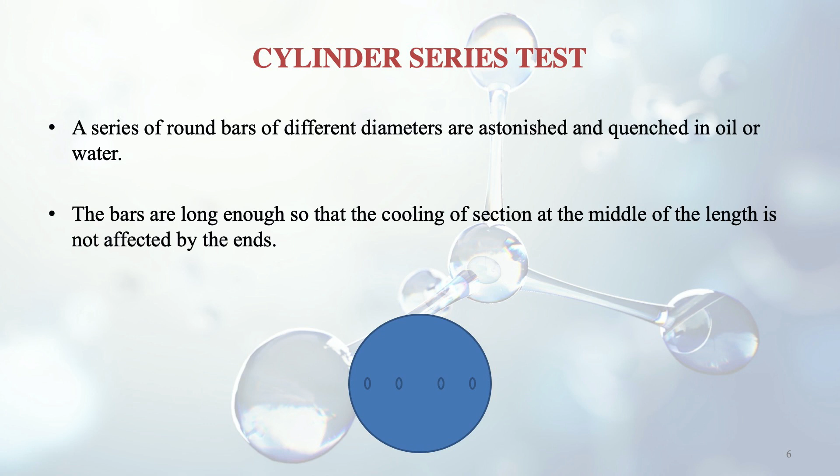The bars are long enough so that the cooling of the section at the middle is not much affected by the ends. If it is not long enough, then the cooling at the middle portion of the cylinder will be affected by the ends. After hardening, what happens?

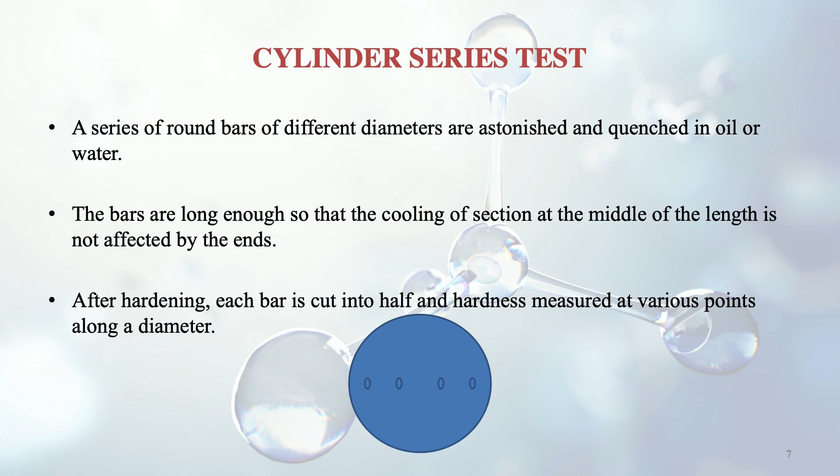Each bar is then cut into half and hardness measured at various points along a diameter. Now suppose this is the cross section, as shown in the figure. This is the cross section of the cylindrical bar, so when it is cut, the cross section will look like this.

Then there are small points, small circles you can see. They are meant to signify that that point is there to measure the hardness up to that region. So these points represent that thing.

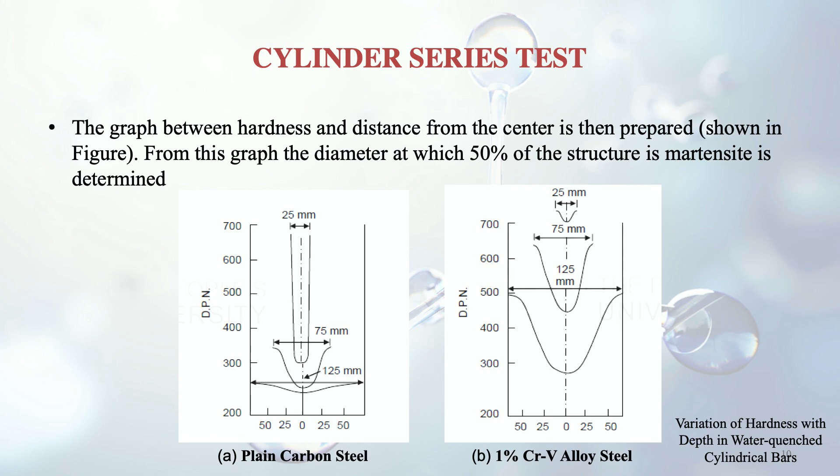We can see that martensite is around 700 on the diamond pyramid hardness number, so around a 25 millimeter diameter cylinder can be turned into 50% martensite. This is what is signified in this figure.

The first figure is for the plain carbon steel which I have described to you, and the second one is for the 1% chromium vanadium alloy steel. You can see in the second figure there is a difference.

At 500 diamond pyramid hardness number, you can see that a 125 millimeter cylinder diameter hardness can be achieved, whereas in the previous case, in the first figure, it was only at a hardness level of 250. So we can see that the chromium vanadium alloy steel gives better hardness.

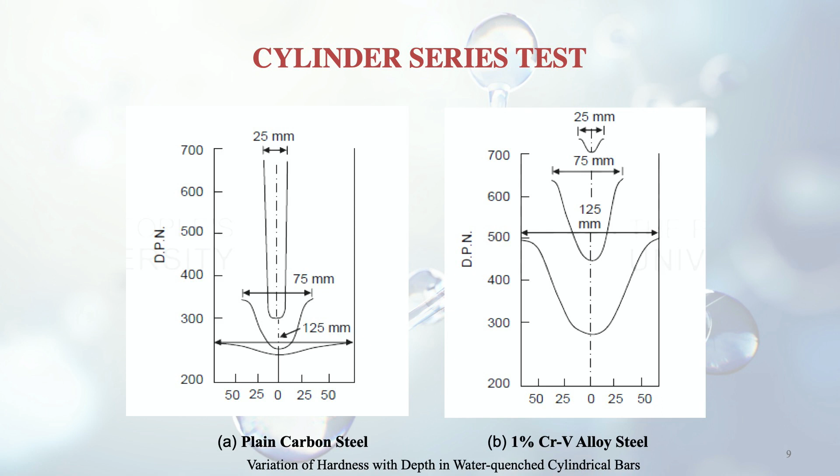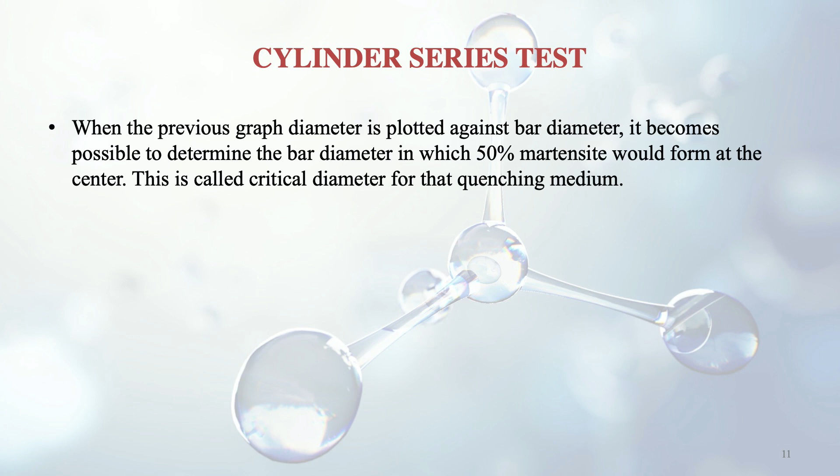This previous graph diameter which we saw is plotted against the bar diameter. In that way, it becomes possible to determine the bar diameter in which 50% martensite would form at the center. When we do this, this diameter is called the critical diameter for that quenching medium, and we get the critical diameter at which 50% martensite of that particular body will be formed.

Since the rate of cooling is less for an oil quench than for a water quench, the critical diameter of any steel will be less for oil quenching than for water quenching. Yes, it is quite obvious, because the rate of cooling in oil is lesser, so lesser martensite will be formed, and when we make a cylinder out of that martensite, its diameter will obviously be lesser.

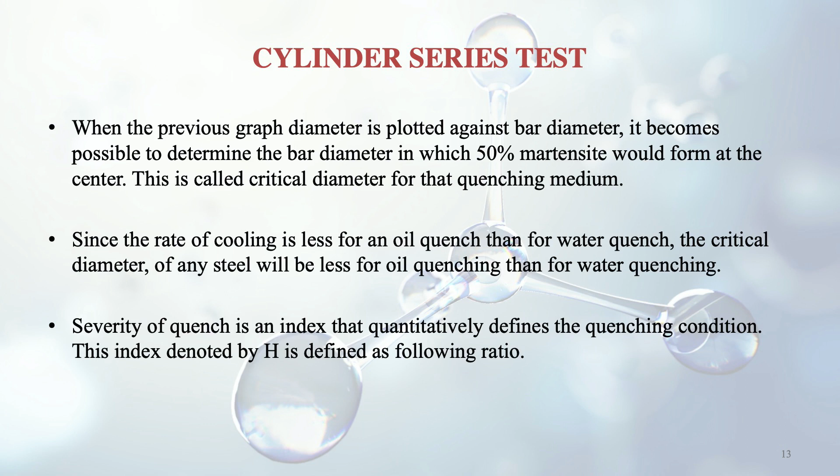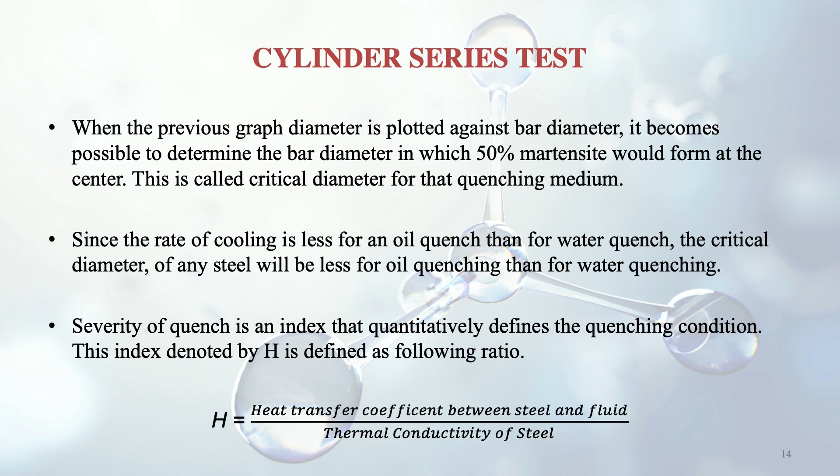The severity of quench is an index which tells us about the quenching condition, denoted by capital H, and is defined as the ratio of the heat transfer coefficient between steel and fluid divided by the thermal conductivity of steel.

So it is the ratio of these two things: heat transfer coefficient between steel and fluid, and thermal conductivity of steel.

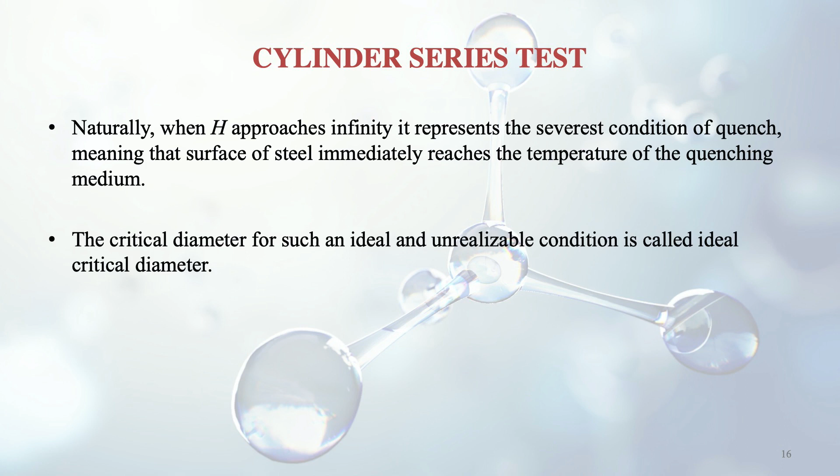When H approaches infinity, this value represents the severest condition of quench, meaning as soon as the surface of steel is in contact with the quenching medium, it immediately changes into martensite, or reaches the temperature of the quenching medium immediately. So the critical diameter for such an ideal and unrealizable condition is called the ideal critical diameter.

And for infinite H value, the critical diameter and the ideal critical diameter will be the same. It is very obvious. Now you see here in this diagram, it will be more clear.

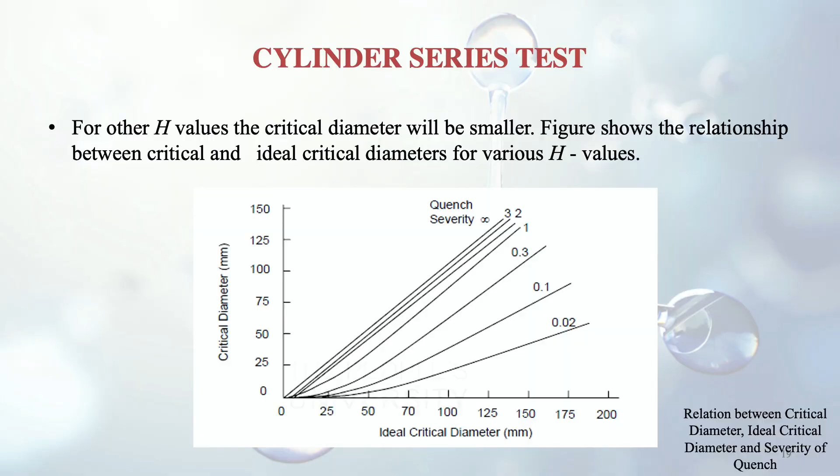And when we move down, then the ideal critical diameter will obviously be larger than the critical diameter. So this was about the cylindrical test, and now we move on to the second test, which is the Jominy test for measurement of hardenability.

This is more convenient actually, and there is a standard specimen of steel shown in the figure. This one is again austenized in the normal manner like it was done in the previous case, and the lower end of the specimen is then quenched by a standard jet of water.

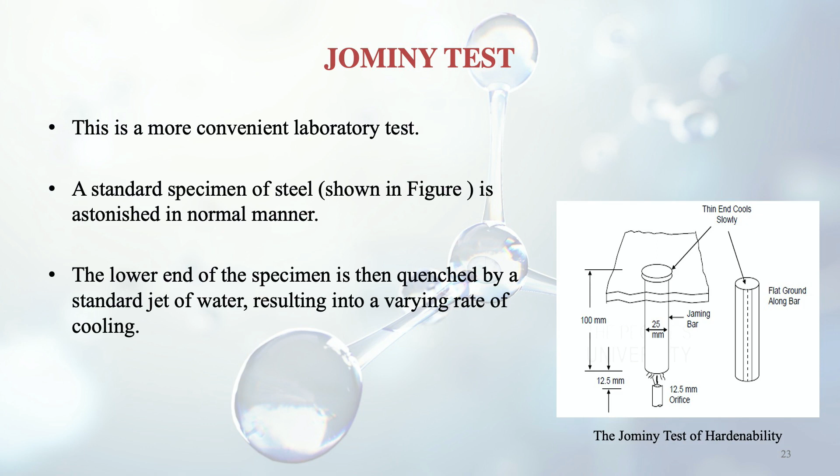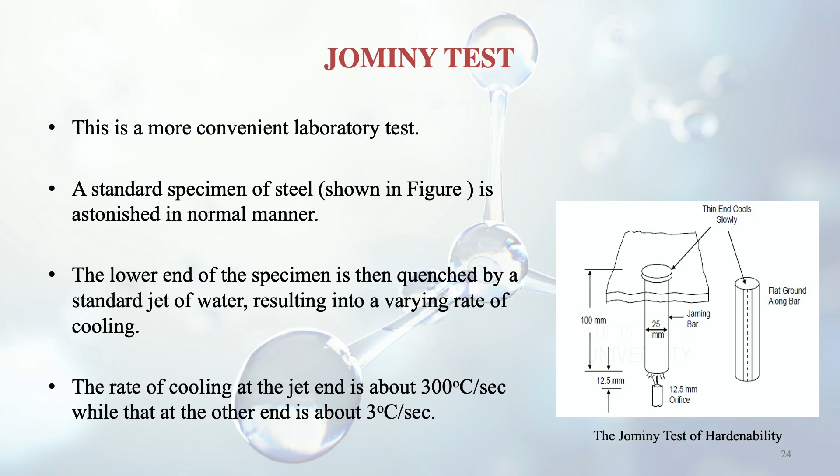You can see in the figure there is a jet of water at the bottom, and it results in varying rates of cooling. The rate of cooling at the jet end is about 300 degrees centigrade per second, while at the other end, the top end, it is only about 3 degrees centigrade per second.

This varying cooling rate produces a wide range of hardness along the length of the Jominy specimen. We know that hardness varies with cooling rate, so if the cooling rate is different at one end and different at the other, obviously the hardness attained in that specimen will also be different at different portions.

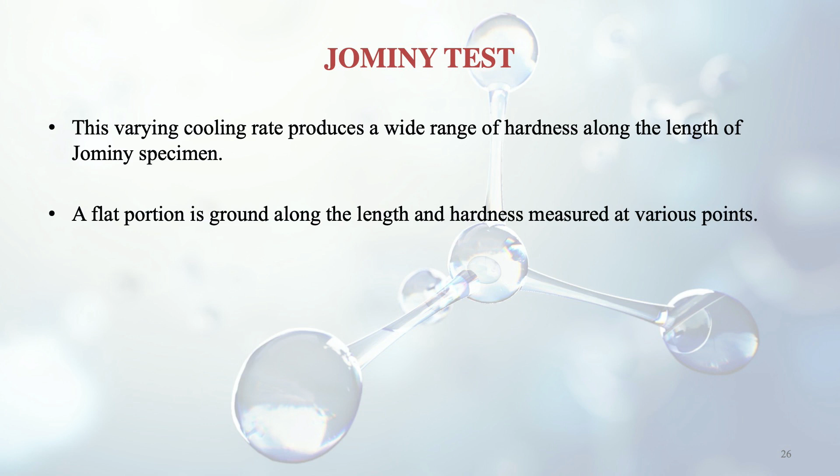A flat portion is ground along the length and hardness is measured at various points, and the plot of hardness along the length gives us the Jominy index of hardenability.

Suppose you draw a horizontal line on the curve from the vertical axis; that line will correspond to the hardness of the semi-martensite zone. Semi-martensite means that 50% martensite has been formed, that's why its name is semi-martensite.

Then from the point where this line meets the Jominy curve, we draw a vertical line which falls onto the x-axis. From there we get the distance from the quenched end for this hardness.

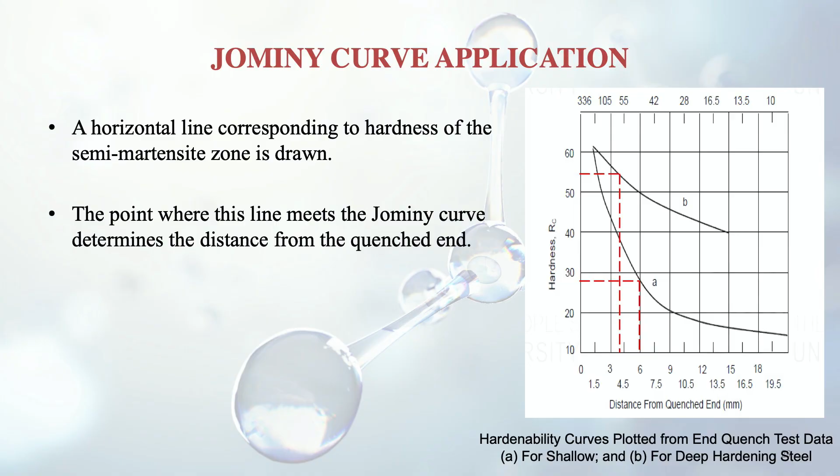From there we got the distance from the quenched end, and now when we plot it against the diameter of the bar, we can get the diameter of the cylindrical bar which can be completely hardened with this process.

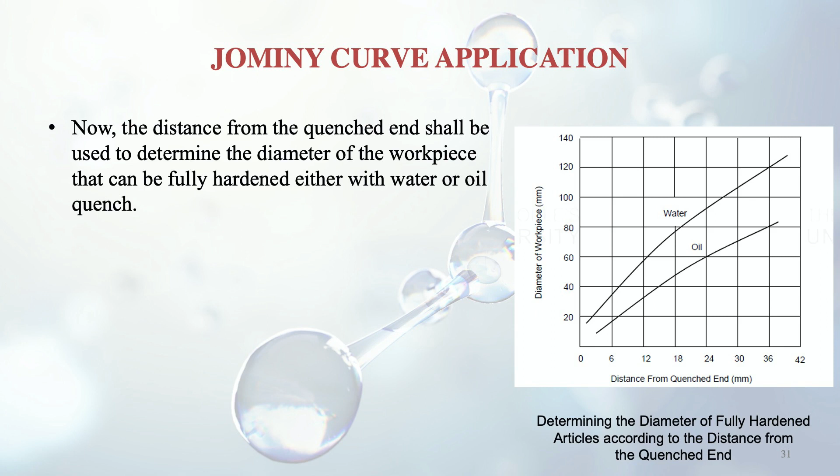If you draw a line on the oil curve up to the oil graph, and from where these two intersect, draw a horizontal line falling on the y-axis, you get the diameter of the cylinder that can be completely hardened. So if it is 6 millimeters distance from the quenched end in case of oil, it will meet around 18 millimeters on the cylindrical bar. So a cylindrical bar of 18 millimeters can be completely hardened with oil, and for water it will be around 38 millimeters, as you can see from the graph.

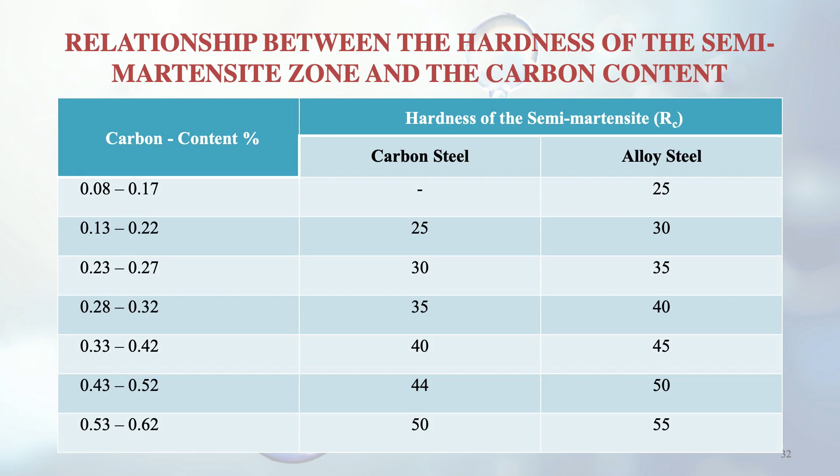After discussing how the measurement of hardenability is done, we move on to the next topic, which is tempering. We will now understand its purpose.

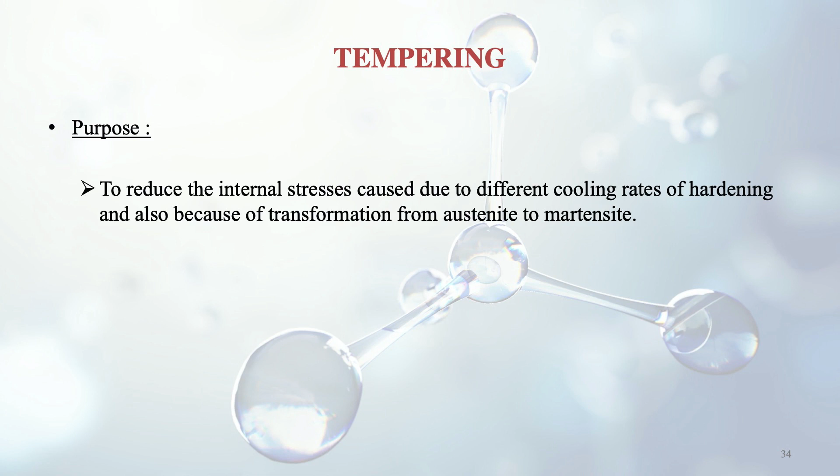The purpose of tempering is to reduce internal stresses. These stresses arise during heat treatment and other mechanical working, and they are detrimental to the microstructure, so they must be removed. They are caused by different cooling rates during hardening and by the transformation from austenite to martensite. As we discussed earlier, when austenite changes to martensite on quenching, cracks and internal stresses can develop. The cooling rate is very important, and tempering helps reduce these stresses.

So what happens in this process? In tempering, the hardened component is heated between 200 and 600 degrees centigrade. We heat the specimen within this range and hold it at that temperature for a predetermined period of time.

There are two main factors: the temperature range and the time for which we hold it, and depending on the holding time we get different results. After holding at that temperature, cooling is done slowly to room temperature. This is the process of tempering.

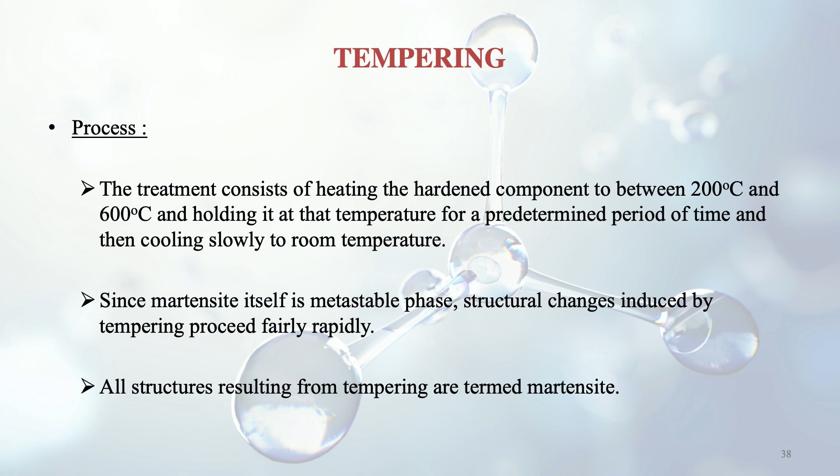Since martensite itself is a metastable phase, structural changes induced by tempering proceed fairly rapidly—it is not a very stable phase, so changes occur easily since no equilibrium exists. All structures resulting from tempering are termed as tempered martensite.

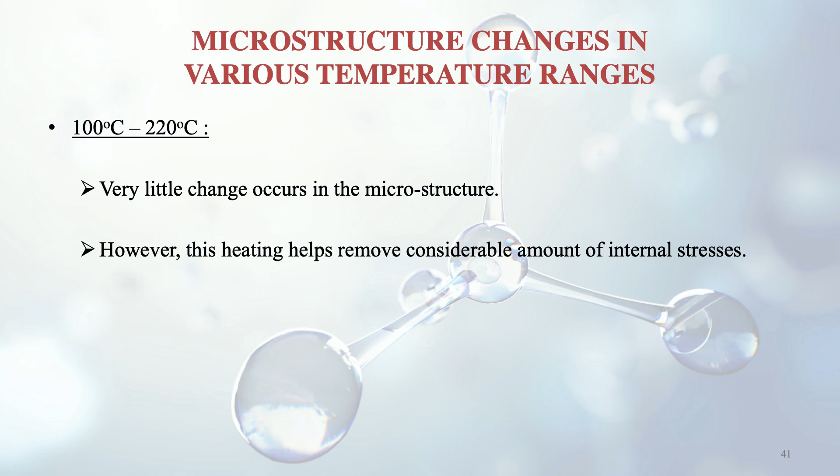Now we take up what happens at different temperature ranges during tempering. In the range of 100 to 220 degrees centigrade, there is very little change in the microstructure, but the heating helps remove a considerable amount of internal stresses.

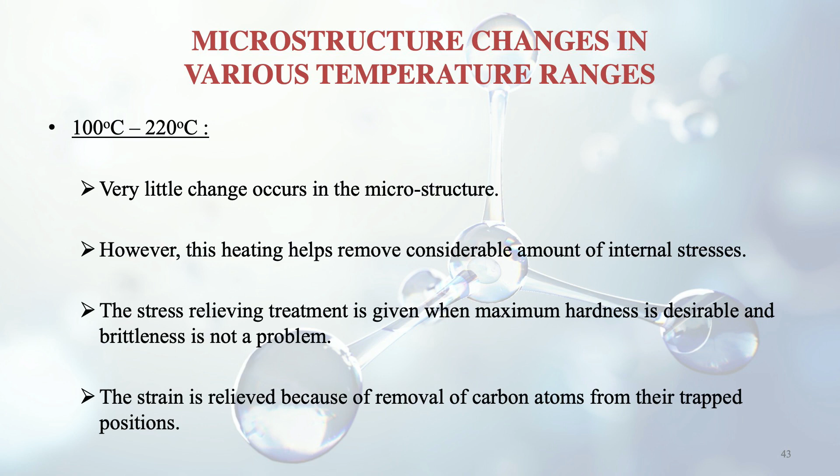Stress-relieving treatment is given when maximum hardness is desirable and brittleness is not a problem—we need to retain hardness while avoiding brittleness, and tempering is very useful here. In this case, strain is relieved due to removal of carbon atoms from their trapped positions. As studied earlier, in martensite the carbon atom occupies a position between the iron atoms, causing distortion and resulting in a body-centered tetragonal structure. Removing this carbon atom gives a better structure with lower internal stress.

After the 100 to 220 degree range, we discuss 240 to 400 degrees centigrade. In this range, martensite decomposes rapidly into an emulsified form of pearlite known as secondary troostite. This material is very fine in nature, and hence it provides good shock resistance.

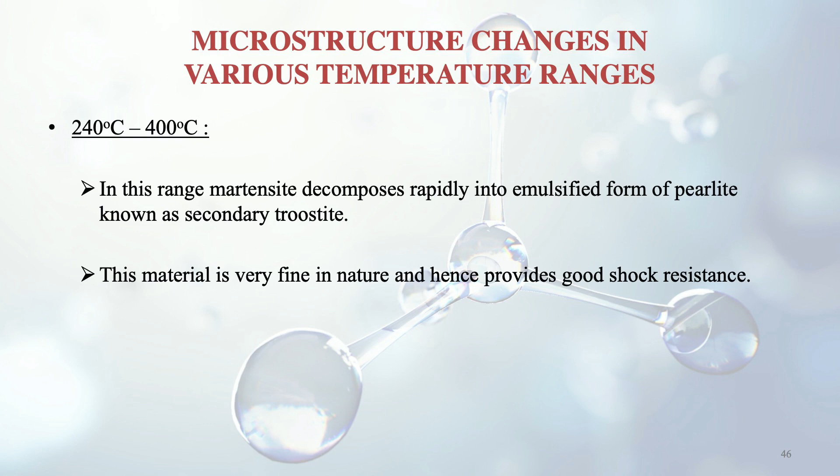So fineness is there, meaning that the nucleation is more and the grain growth is less, and it is helpful in shock resistance. We need this thing, shock resistance, in many processes, like in the case of vehicles also shock absorbers are there. So this material can be helpful in that case.

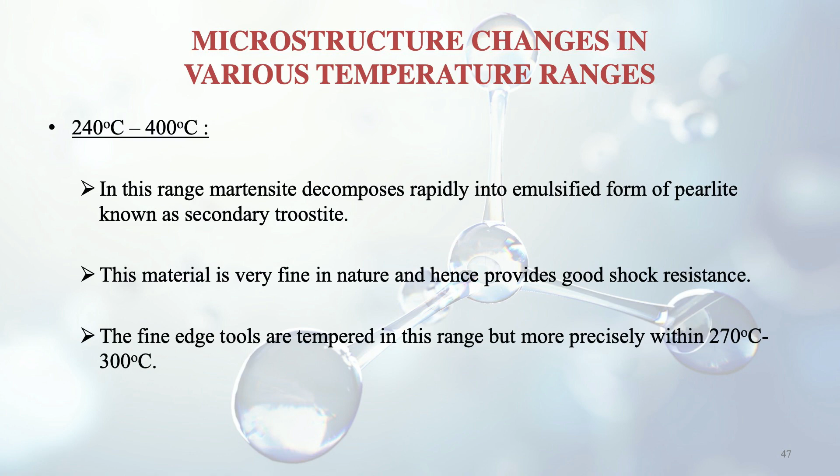Then the fine edge tools are tempered in this range, but more precisely within 270 to 300 degrees centigrade. So another application is there of the fine edge tools. Sometimes to get more precision, they are heated up to 270 to 300 degrees centigrade.

Further, now we move on to a higher temperature, 400 to 500 degrees centigrade. Here what happens is that the troostite which was formed in the earlier range begins to coalesce, forming a coarse form of globular pearlite known as sorbite. So the earlier one was troostite, now it is getting coalesced and forming something coarser. It is not that fine, meaning the interstitial spaces are more now, and the grain growth is taking place more rapidly instead of nucleation, and this is known as sorbite.

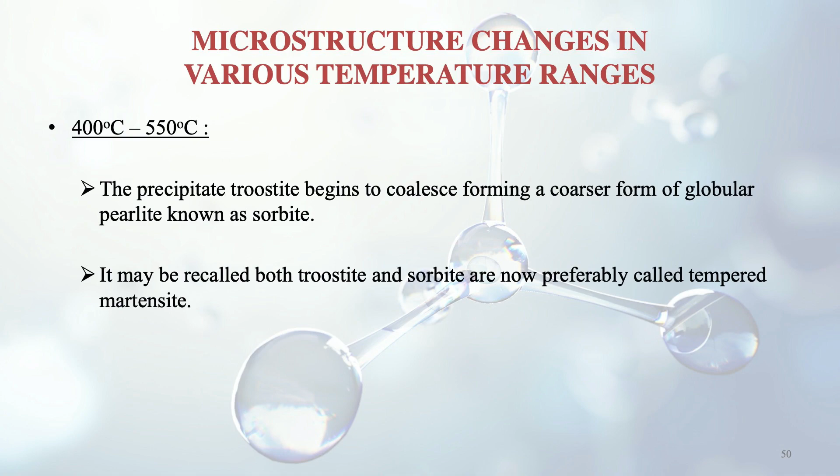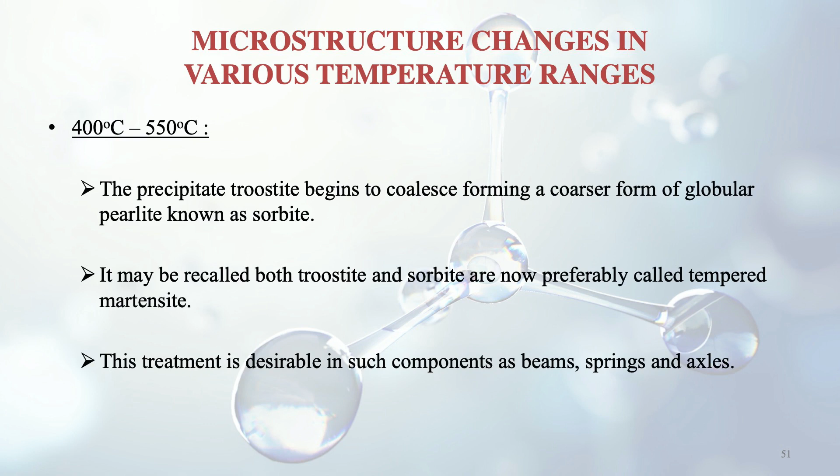It may be recalled that both troostite and sorbite are now preferably called tempered martensite. Like earlier I told you, everything that is being tempered is termed in terms of only martensite. So here also they are known as tempered martensite. This treatment is desirable in components like beams, beams in buildings, then springs, and axles, the vehicle axles you may be knowing. So in those things, this kind of tempered martensite is being used.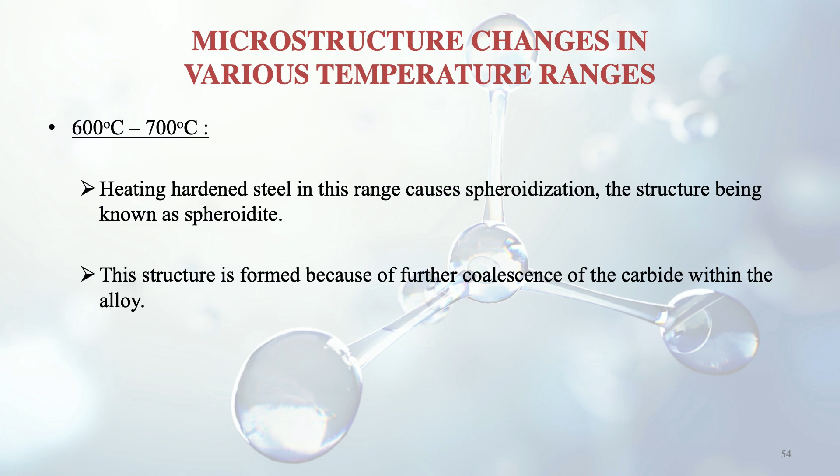Further higher we move up into the 600 to 700 degrees centigrade temperature range. Here heating the hardened steel causes spheroidization. So this is a new process, spheroidization takes place, and the structure is known as spheroidite. This structure is formed because of further coalescence of the carbide within the alloy. So there is carbide within the alloy, and when these coalesce, then we are getting the spheroidite. So these spheroidized steels actually show very good machinability.

And why do they show like that? Because there is a mixture of the carbide particles and the ferrite matrix. So ferrite has softness property, whereas carbide shows more hardness. So both the things are there, so they are easily machinable, and they do not have to be cut excessively by the cutting tool.

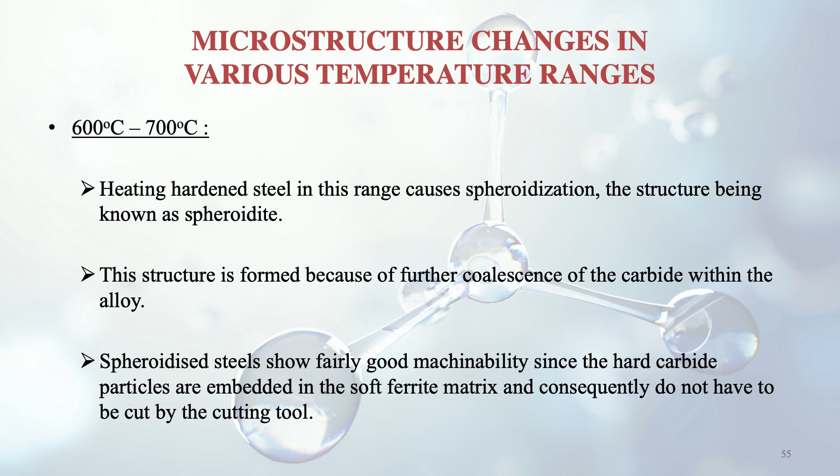If the spheroidized steel is heated to just above its lower critical temperature, what happens then? The pearlite present will alter to austenite, and cooling to room temperature will yield a structure of lamellar pearlite plus pro-eutectoid ferrite or cementite, depending upon the carbon content.

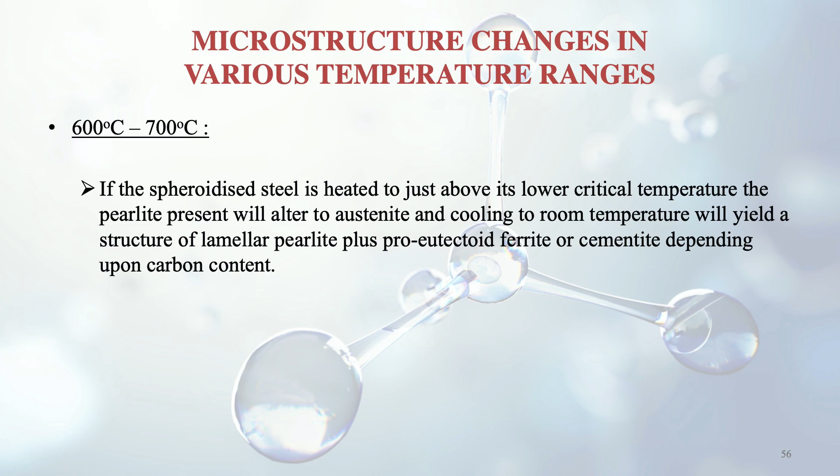So to better understand lower critical temperature, we have done before, that is 723 to 738 degrees centigrade, as you know. When it is heated up to that temperature and further cooled to room temperature, what we get is either lamellar pearlite plus pro-eutectoid ferrite, because it can go towards the hypoeutectoid zone also and towards the hypereutectoid. Eutectoid we have studied earlier, it is 0.8% carbon. So when it goes towards the hypoeutectoid, then it will give ferrite, and when it goes towards the hypereutectoid, then it will give cementite. So either mixture will be of pearlite plus ferrite or pearlite plus cementite.

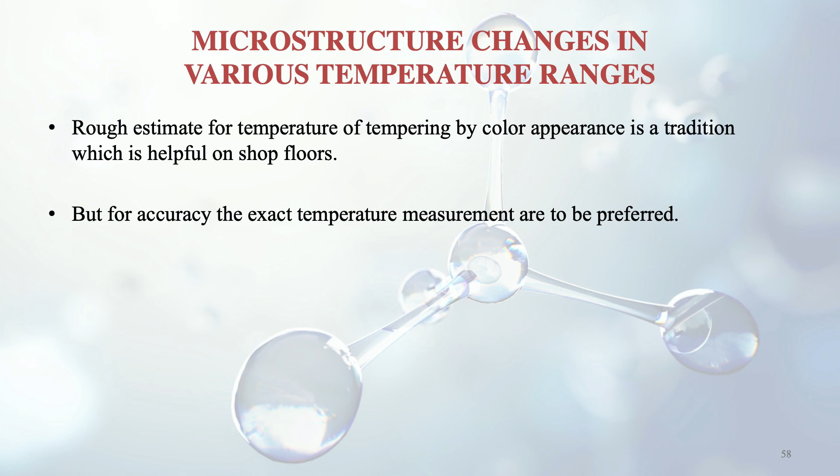So a rough estimate for the temperature of tempering by color appearance is also a tradition which is helpful on shop floors, but it is not that accurate and doesn't give us exact temperature measurement, but still just by vision we can get a certain degree of correctness. So from the table you can see for planning tools the tempering temperature is 230 degrees and it gives a color of pale straw. Similarly, there are other things mentioned, you can learn from this table, like for cold chisels, tempering temperature is 280 degrees centigrade and the color is dark purple. So there are others also, and it is a kind of guess and not an exact thing, but it still gives a good prediction.

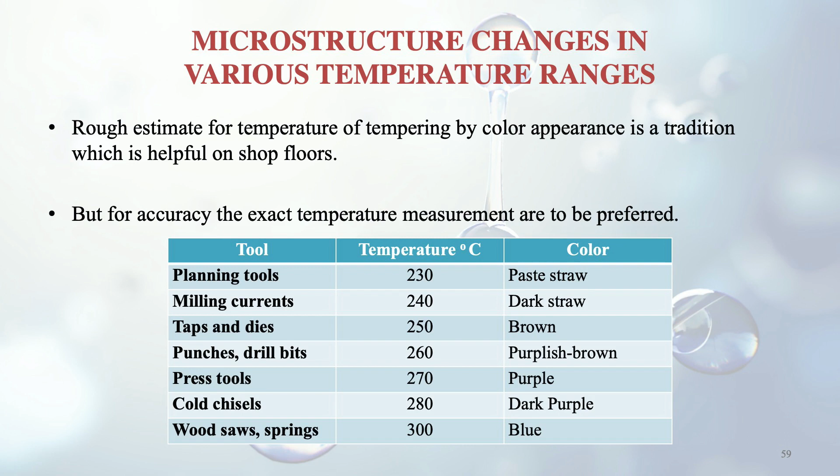So now we will take up changes in mechanical properties with tempering. We learnt about this process, and now what benefits does it give us. It improves the ductility and toughness of the quenched steel and decreases the hardness. So two things it is giving: ductility and toughness increase, and hardness gets decreased.

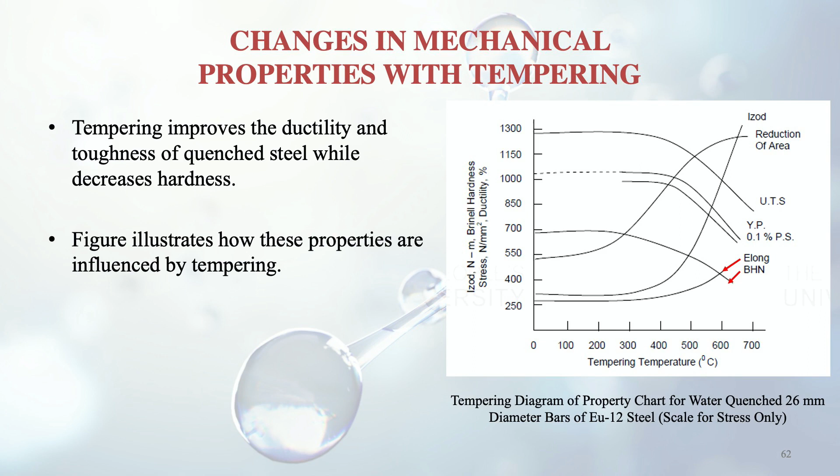Similarly for ductility, with higher temperature range this ductility is increasing, and with the red arrow you can see the BHN, the Brinell hardness number, going down. So like I discussed earlier, ductility and toughness increase and hardness goes down. The tempering temperature is so chosen that it results in the desired combination of properties, like I discussed with the earlier graph, how properties change and how we get different impact strength and ductility values. So from this graph you can choose the tempering temperature according to your requirement.

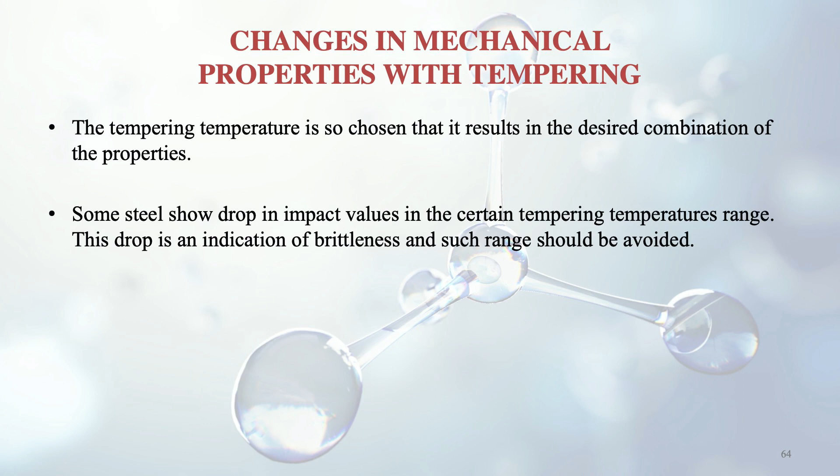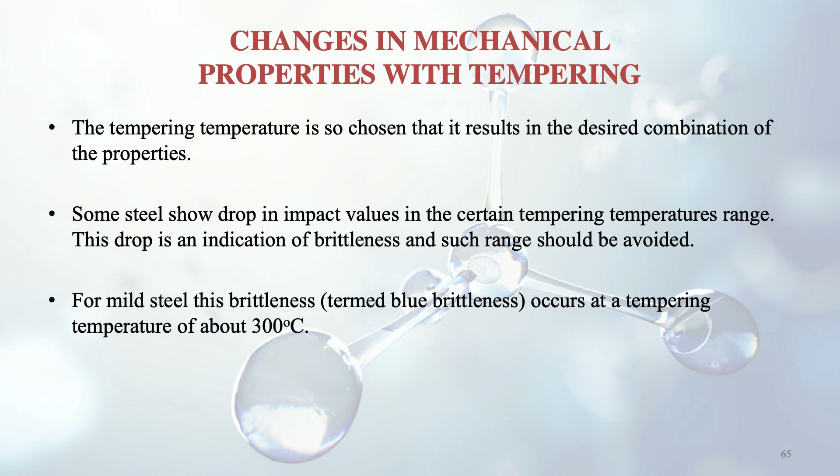Some steels show a drop in impact values in a certain tempering temperature range. So this drop is an indication of what? Brittleness, because toughness will decrease and brittleness will come in, and this range should be avoided. For mild steel, this brittleness, also known as blue brittleness, occurs at a tempering temperature of about 300 degrees centigrade. So for mild steel we will have to avoid this temperature of 300 degrees centigrade.

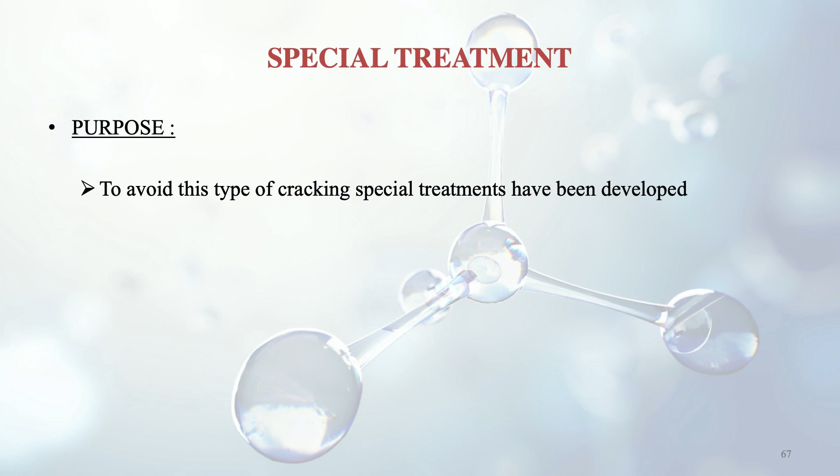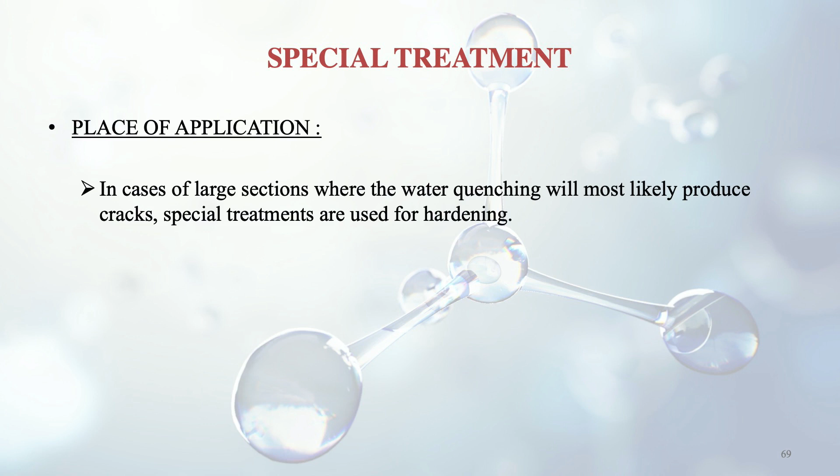So now we discuss some special treatments after discussing the tempering process, and why this special treatment is needed. The purpose is to avoid any types of cracking, that's why we give these types of treatments. Where these are applied: in case of large sections where water quenching will most likely produce cracks, and therefore we do a special treatment.

And why do these cracks appear actually? Because the skin cools faster and changes into martensite, while the inner core cools slowly and transforms later, so dilation occurs. This dilation causes the outer skin to crack.

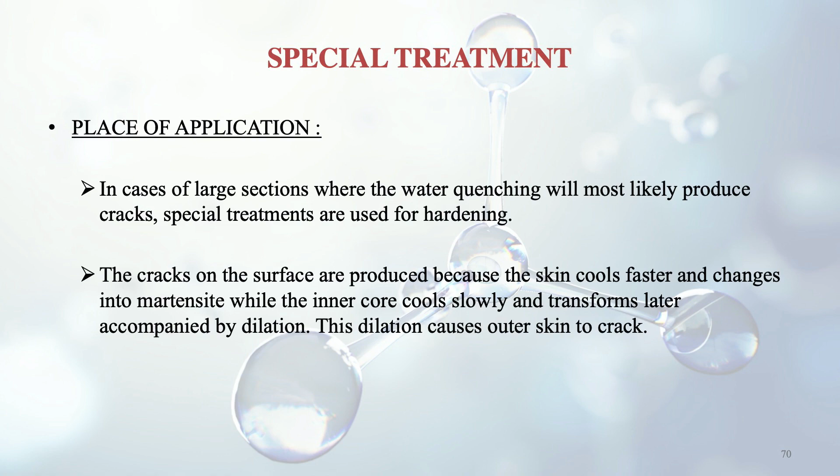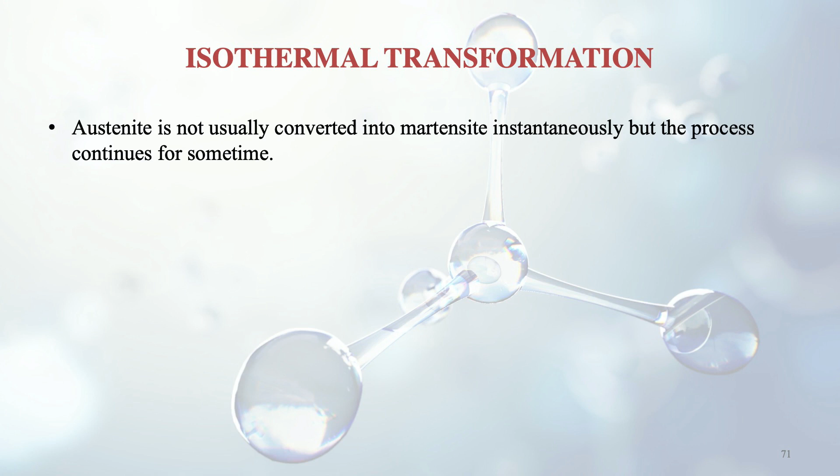Thus, now we discuss the isothermal transformation, which comes under special treatments only. So austenite is not usually converted into martensite instantaneously, but the process takes certain time. Different steels take different time for full transformation, like we discussed in our time transformation diagram earlier, that there is a certain time gap in which transformation takes place. So this time depends upon the temperature from where cooling begins.

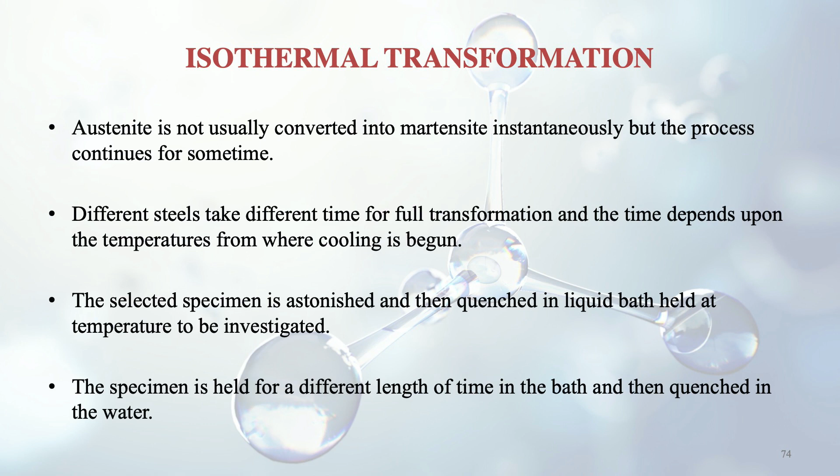The selected specimen is again austenized and then quenched in a liquid bath, held at a certain temperature to be investigated. This specimen is held for different lengths of time, like I discussed earlier, that both temperature and length of time are very important. The resulting structure can then be studied under a microscope to get the hardness and other associated properties. It is seen that definite times are required for the initiation and completion of transformation, and these times vary with temperature.

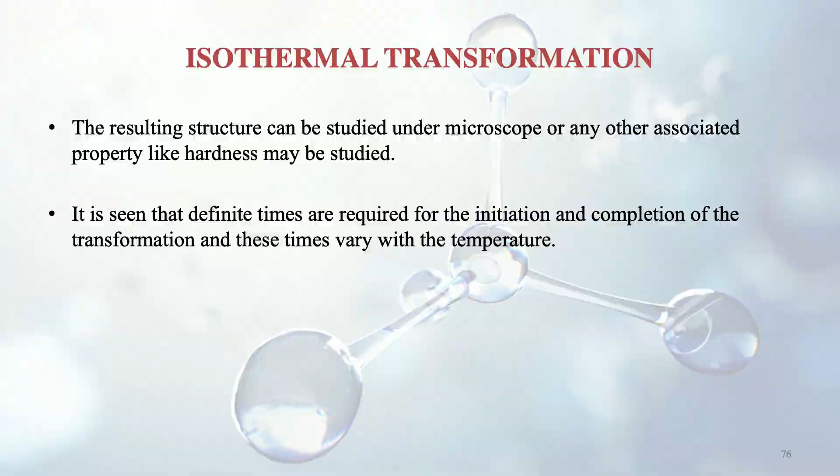So if you recall from the time transformation diagram, at different temperatures the time taken for transformation was different. The same thing is given here. Here is the TTT diagram, and it gives the complete transformation of eutectoid steel. So we are discussing eutectoid, that is 0.8% carbon steel. As the transformation temperature is lowered from A1 temperature, about 723 to 727 degrees, to about 550 degrees centigrade, what will happen?

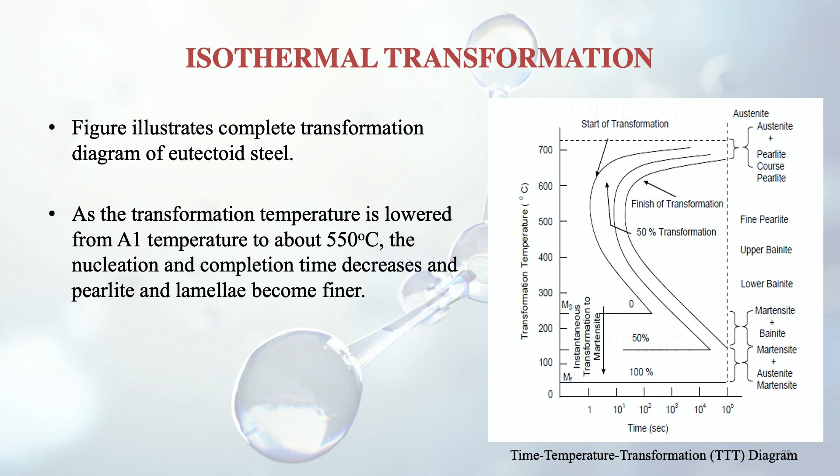The transformation product here is termed bainite, a new term now. Instead of pearlite, we call it bainite, which is composed of two equilibrium phases, that is ferrite and cementite. The time of minimum nucleation is identified as the nose or knee, which you have learnt in the time transformation diagram earlier also. The nose is there because the transformation time is lesser at that point, that's why the nose is formed.

Below about 250 degrees centigrade, the transformation product is martensite. As we know, if quenching is done or the cooling rate is very high, then martensite is formed as we reach the 250 degrees centigrade range. This happens almost instantaneously, but the amount formed depends upon the temperature.

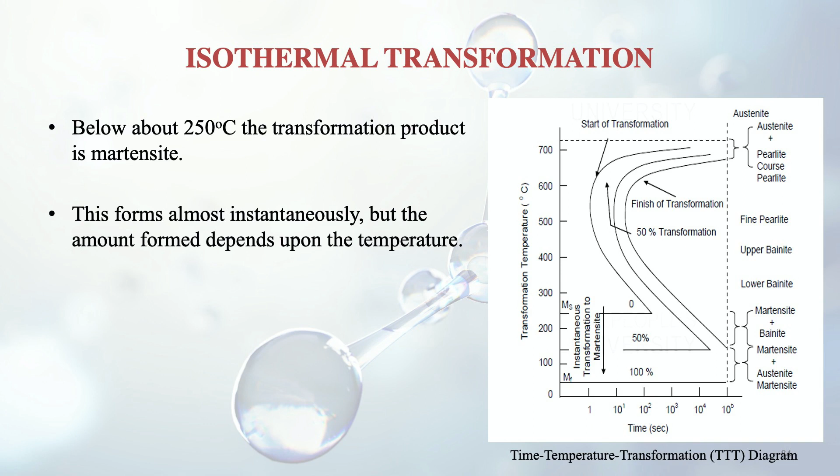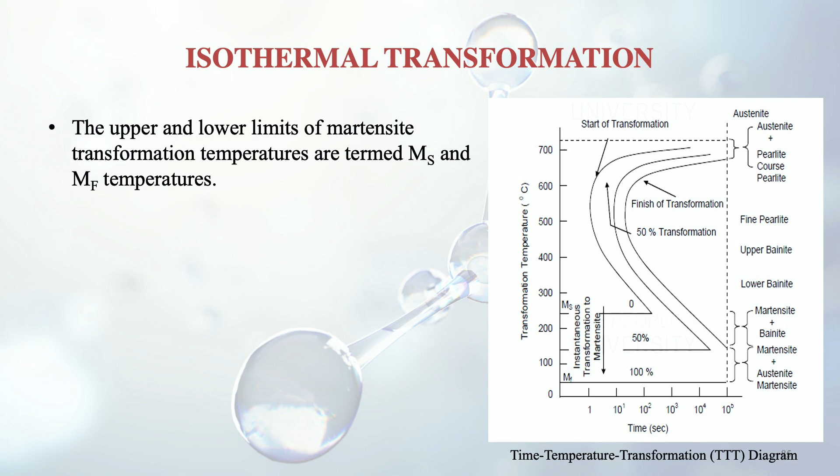So there are upper and lower limits of martensite transformation also, because the temperature at which it starts and the temperature at which it ends will govern this. The first one, the starting one, is known as MS, martensite formation start, and MF represents the martensite finish temperature. So from this diagram we can see how different heat treatment processes give us different results, like the Austempering and the Martempering we discussed.

So we can see from this diagram what things are formed - microstructure changes. In the range of 250 degrees centigrade, you can see from the figure that there is martensite, and there may be a mixture of bainite and martensite depending on the process. If it is austempering, then bainite will also be there. If it is martempering, then only martensite will be there.

Moving up, if we see the range of 300 to 500 degrees centigrade, we can see lower bainite, upper bainite, and fine pearlite also. Fine pearlite means that nucleation has taken place in a right manner and grain growth is lesser.

In the upper region, around 600 to 700 degrees centigrade, we see a mixture of austenite plus pearlite, or there may be only pearlite, depending upon the temperature.

From this curve, as you have studied earlier in the TTT diagram, there is the nose, which represents the fastest transformation. You can see the lines: there is the start transformation line, the finish transformation line, and the 50% transformation line, meaning 50% martensite or pearlite is being formed.

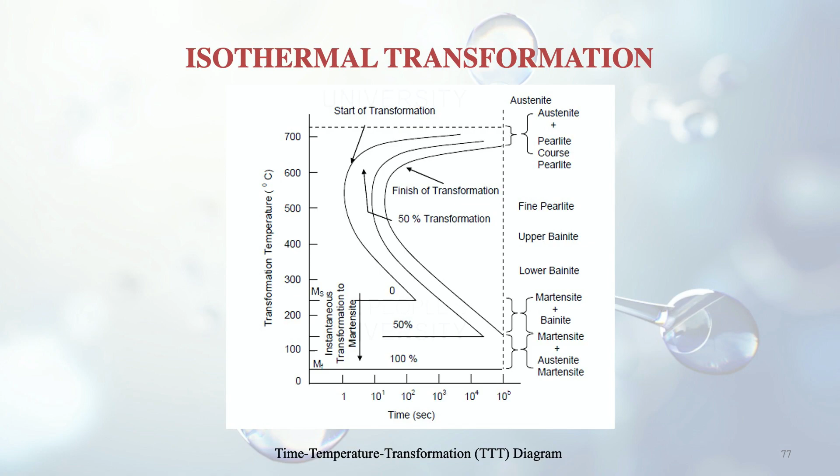This gives us information about the different microstructures formed due to different heat treatments. So further we move on and discuss a new heat treatment, that is austempering. What is done in austempering?

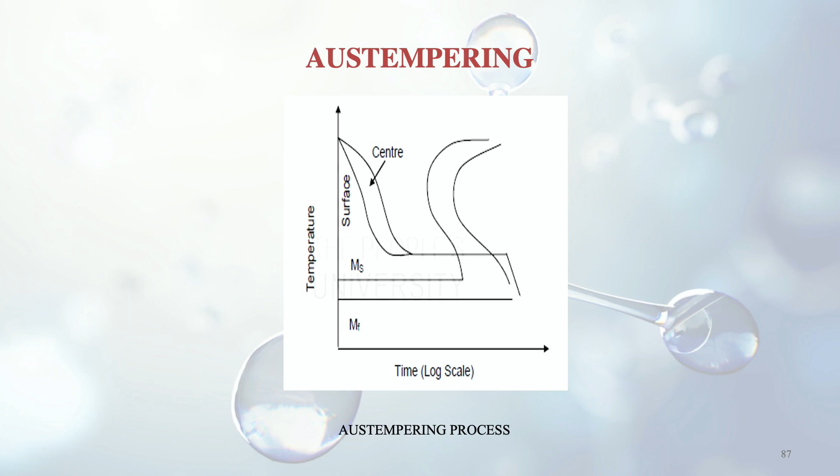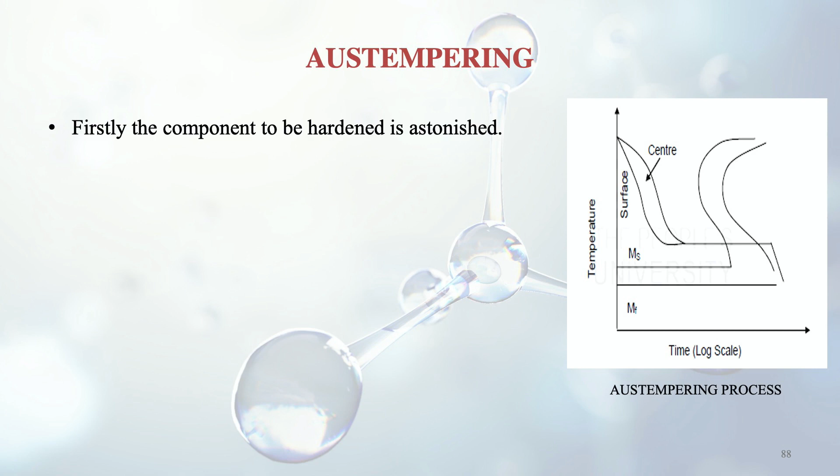If you see from this TTT diagram, where time is on the log scale and temperature is on the y-axis, first the component is austenized, like we have seen earlier. First austenizing takes place, as in tempering also, and then it is quenched in a lead or salt bath just above the martensite transformation temperature.

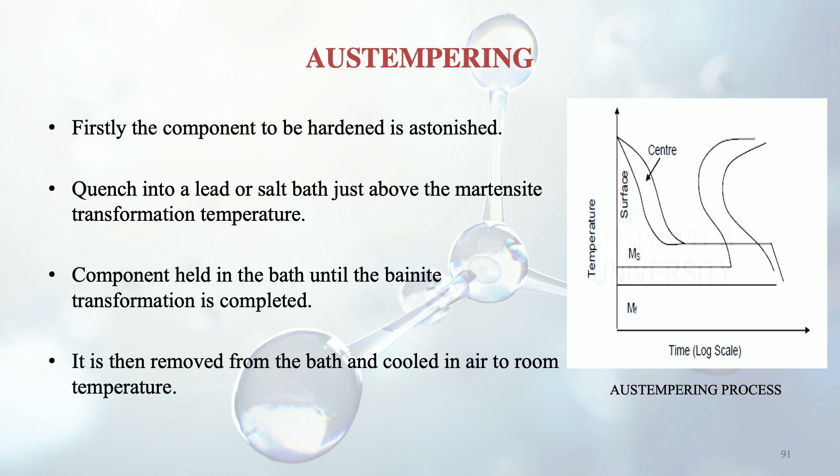This quenching is done up to a temperature just above where the martensite transformation starts. The component is then held in the bath until the bainite transformation is completed, and then it is removed from the bath and cooled in air to room temperature. So here we are doing bainite production, with cooling done in air till room temperature is reached. This is about austempering.

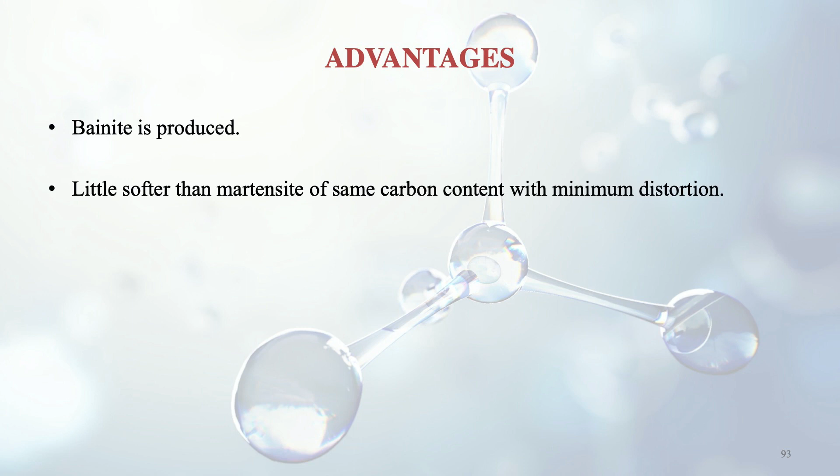As discussed, bainite is produced and it is a little softer than martensite of the same carbon content. That's why we do austempering, and there is minimum distortion. Also, austempered steel has improved shock resistance and low notch sensitivity. So if we are doing austempering, we get better shock performance - more shock resistance, increased impact resistance, and low notch sensitivity.

Further we discuss the other process, that is martempering. After austempering, there is one more process, martempering. So what is the difference between the two? We will know after discussing this.

The process is like this: the piece or specimen is hardened and fully austenized, like the earlier case of austempering. This is similar, and then it is quenched into a lead or salt bath, held at a temperature just above where martensite would begin to form. So up to this point, all things are similar to austempering.

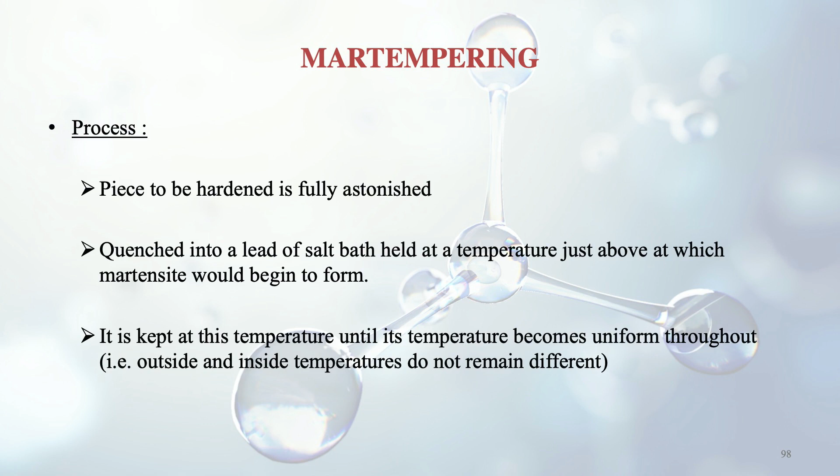It is kept at this temperature until its temperature becomes uniform throughout - we keep it for a certain time so that every portion of the specimen, whether outside or inside, has a uniform temperature. Then it is water quenched to form complete martensite, such that bainite formation is prevented.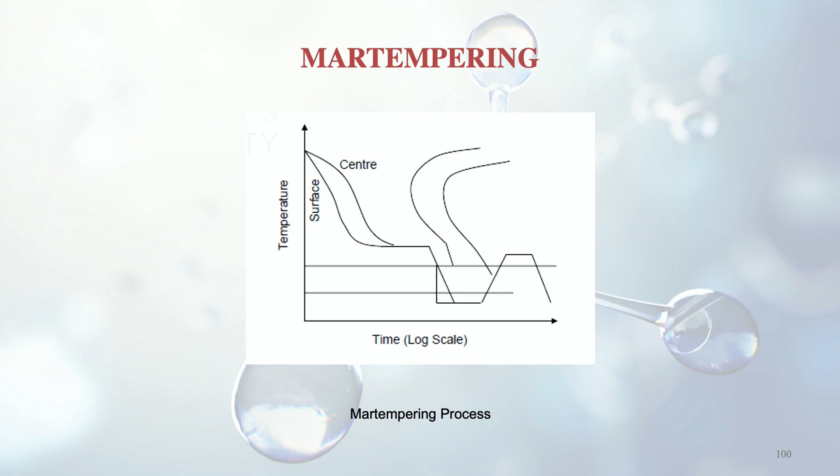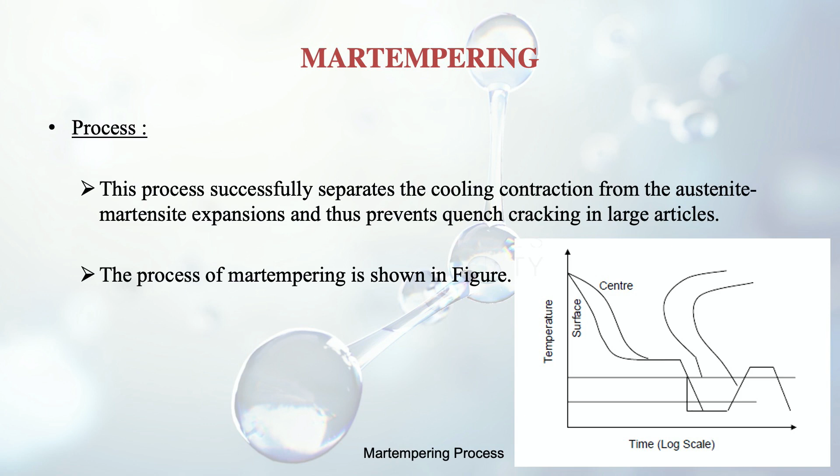So this process successfully separates the cooling contraction from the austenite-martensite expansion, and thus prevents quench cracking in large articles. This is the benefit of this process.

So in this session we covered things like hardenability and how it is measured. We also discussed different special treatments like isothermal transformations, martempering, and austempering. This was covered in this session, and further things like surface hardening and others we will discuss in the next session. Thank you very much.